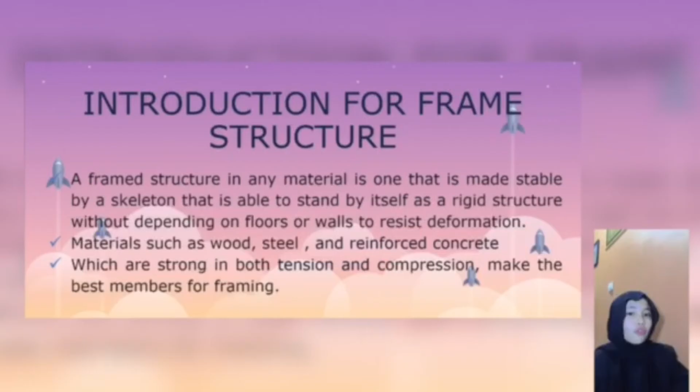Introduction to frame structure. A frame structure in any material is one that is made stable by a skeleton that is able to stand by itself as a rigid structure without depending on floors or walls to resist deformation. Materials such as wood, steel, and reinforced concrete are strong in both tension and compression, making the best members for framing. They are classified into two major types: rigid frame structures and braced frame structures.

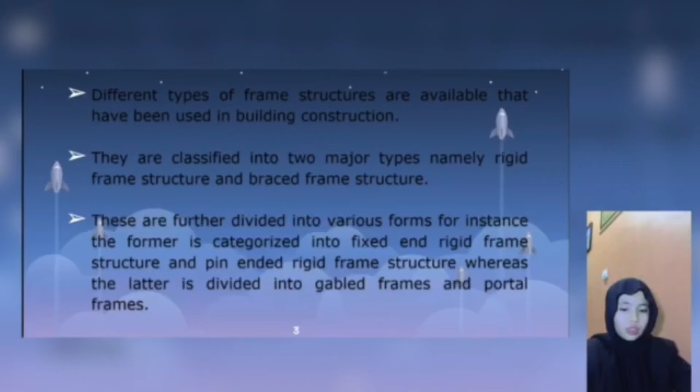These are further divided into various forms. The former is categorized into fixed rigid frame structure and pin-ended rigid frame structure, whereas the latter is divided into gable frames and portal frames.

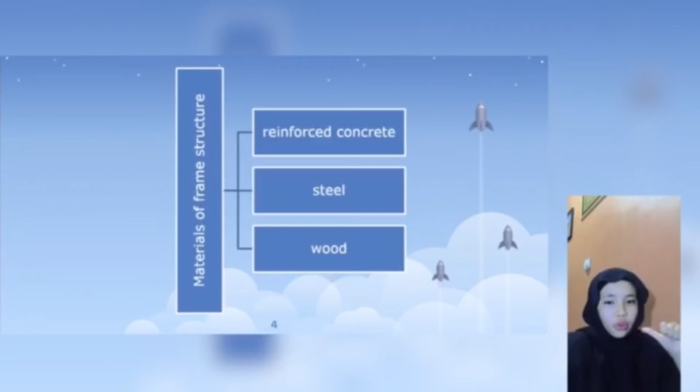Next, the materials of frame structure. There are three: the first is reinforced concrete, second is steel, and the third is wood.

Advantages of frame structures: one of the best advantages is their ease of construction. It is very easy to teach the labor at the construction site. Second, frame structures can be constructed rapidly. Third, economy is also a very important factor in the design of building systems, and frame structures have economical design.

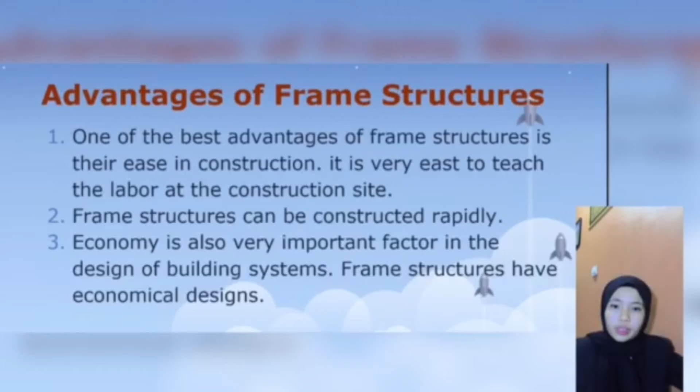Now, disadvantages of frame structures. Number 1, span length is usually restricted to 40 feet for normal reinforced concrete. Otherwise, spans greater than that can cause lateral deflection.

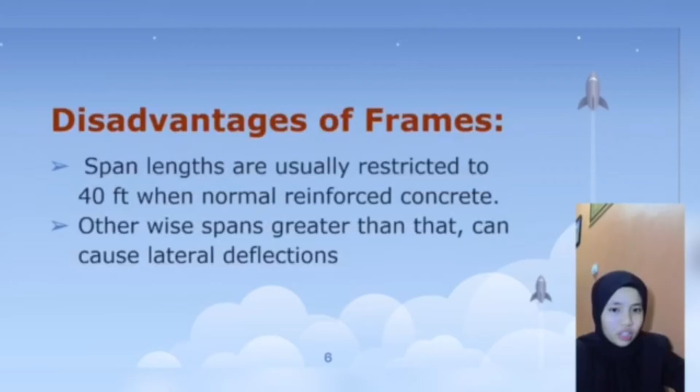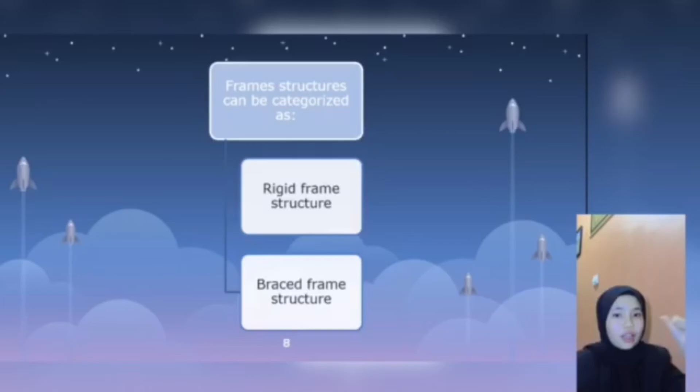What are the types of frame structures? Frame structures can be categorized into two: rigid frame structures and braced frame structures. The structure of a steel rigid frame building is characterized by its rigid connections of straight or tapered columns and beams. Rigid frame structures were developed in cities like Chicago and Cleveland in the late 19th or early 20th century.

This type of frame is preferred for its quick erection, open span, and versatile design.

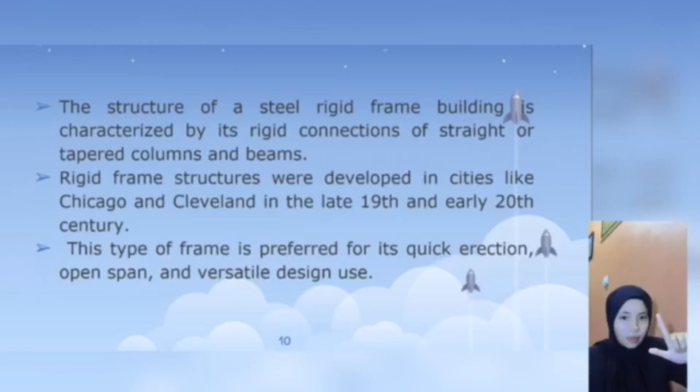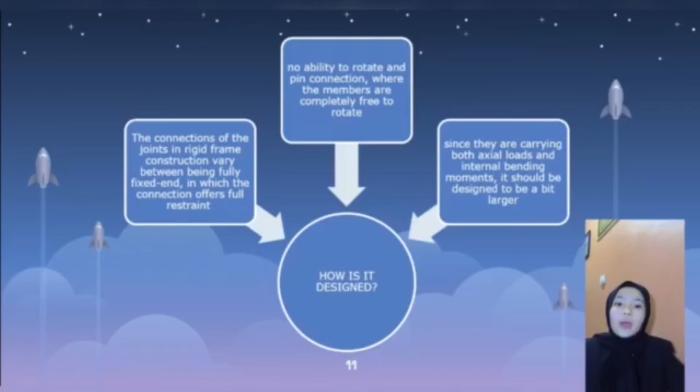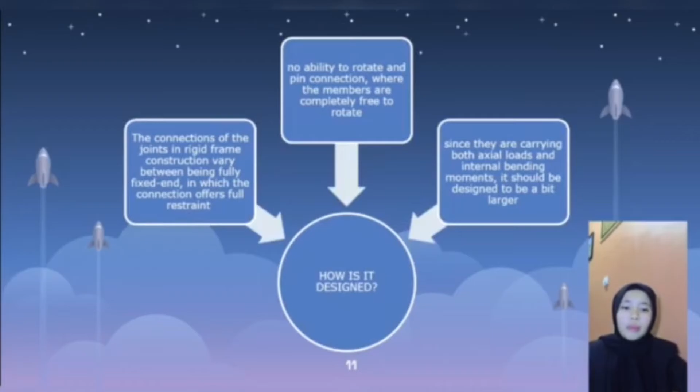How is it designed? The connection of the frame joint in rigid frame construction varies between being fully fixed, where the connection offers full restraint with no ability to rotate, and pin connection, where members are completely free to rotate. Since they carry both axial loads and internal bending moments, they should be designed to be a bit larger. There are some examples of building applications.

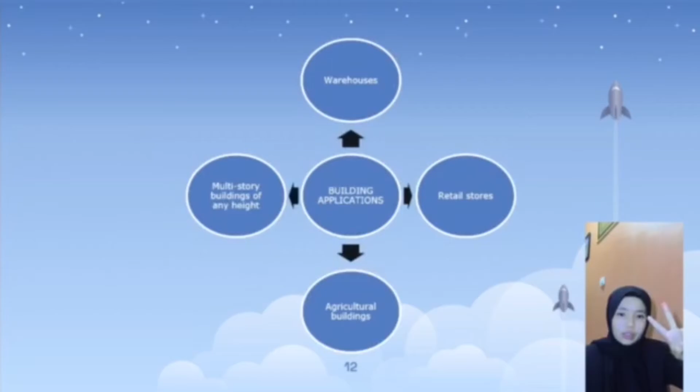The first ones are warehouses, retail stores, agricultural buildings, and multi-story buildings of any height.

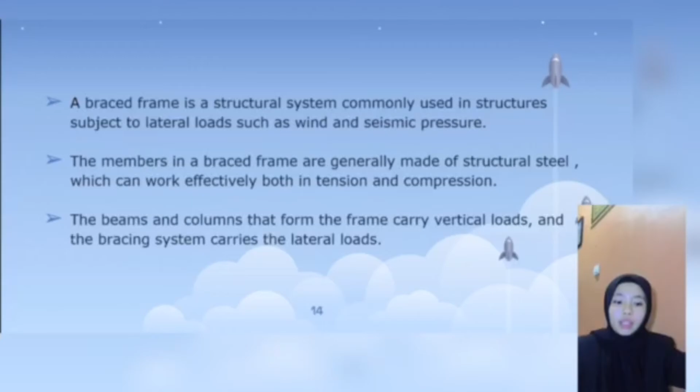Now, braced frame structures. A braced frame is a structural system commonly used in structures subject to lateral loads such as wind and seismic pressure. The members in a braced frame are generally made of structural steel, which can work effectively both in tension and compression. The beams and columns that form the frame carry vertical loads, and the bracing system carries the lateral loads.

The positioning of braces, however, can be problematic as they can interfere with the design of the facade and the position of openings. Buildings adopting high-tech or post-modernist styles have responded to this by expressing bracing as an internal or external design feature.

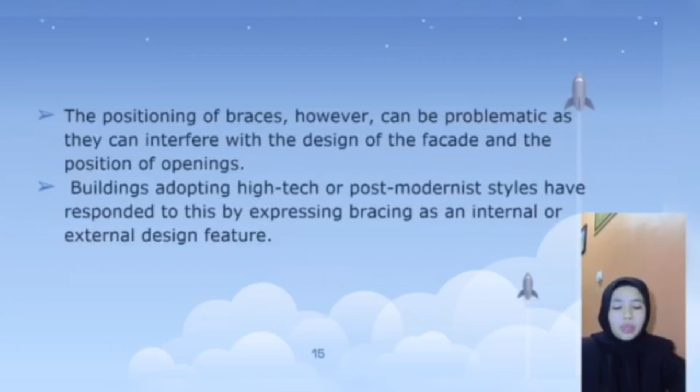So today I will talk about column. In this presentation, I will talk about what a column is, types of column, the function of column, and a few ways to install column in construction. Let's get started.

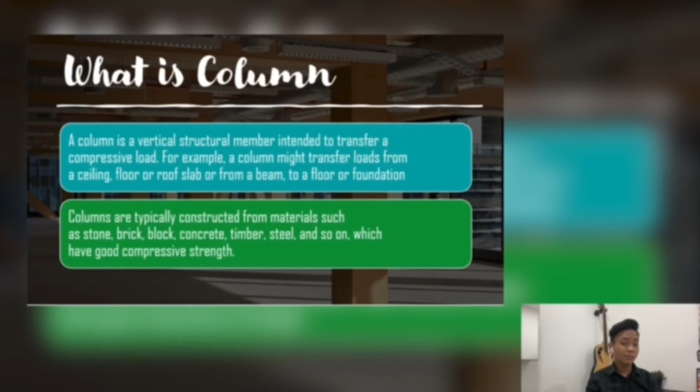First, the definition of a column. A column is a vertical structural member intended to transfer a compressive load. For example, a column might transfer loads from a ceiling, floor, or roof slab, or from a beam to a floor or foundation. Columns are typically constructed from materials such as stone, brick, block, concrete, timber, steel, and so on, which have good compressive strength. As we know, the column is the most important structure in a construction.

So first I will share with you guys about types of column. We've got tied column, spiral column, composite column, short column, long column, square or rectangular column, circular column, L-shaped column, T-shaped column, shape of steel column, shape of composite column, and some materials like concrete, steel, timber, brick, block, and stone column. But today, I will talk about precast column, timber, and steel column.

The first one is precast column. Precast concrete columns may be single or double-story high. The method of connection to the foundation and to the column above will vary with manufacturer.

Foundation connection may be via a base plate connected to the column, or by reinforcing bars projecting from the end of the column, passing into sleeves that are subsequently filled with grout. Alternatively, a column may be set into a preformed hole in a foundation block and grouted into position.

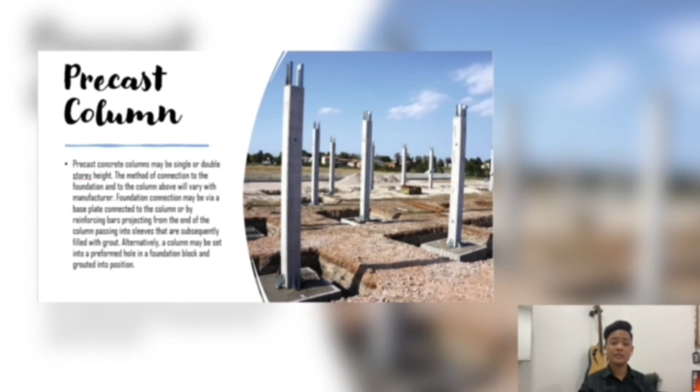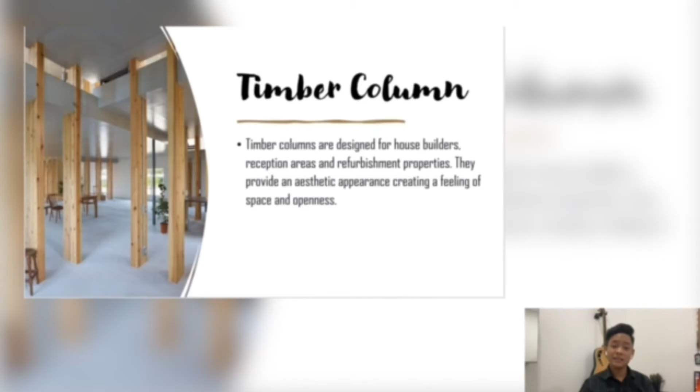Next, for timber column, they are designed for house builders, reception areas, and refurbishment properties. They provide an aesthetic appearance, creating a feeling of space and openness. And the last one is steel column.

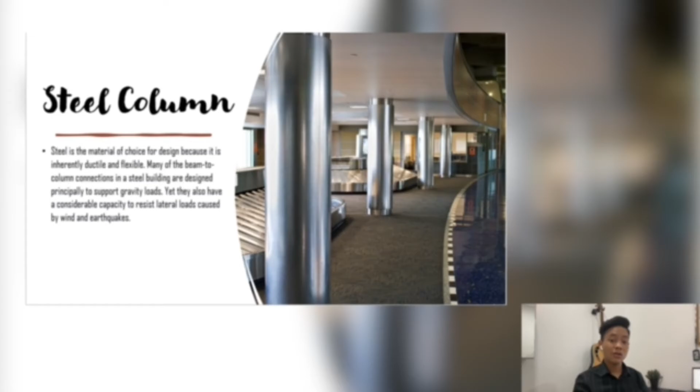Steel is the material of choice for design because it is inherently ductile and flexible. Many of the beam-to-column connections in a steel building are designed principally to support gravity loads. Yet, they also have considerable capacity to resist lateral loads caused by wind and earthquakes. Steel columns have good compressive strength, but have a tendency to buckle or bend under extreme loading.

Next, we will go through the function of the column. A column is used to support the weight of the roof and the upper floors. Nowadays, many columns are used for decorative purposes.

A column along with load-bearing beams can support a lot of weight. Columns are frequently used to support beams or arches on which the upper part of walls or ceiling rests. In architecture, columns refer to a structural element that also has certain proportional and decorative features. So, for me, column is one of the important structures.

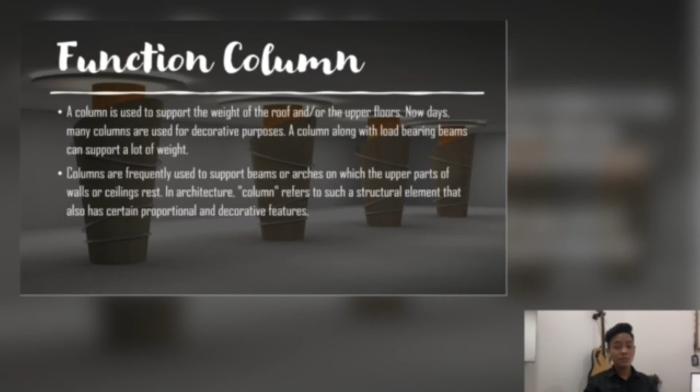Last but not least, I will go to column installation. We've got socket connection, bolted connection, and starter bars. For socket connection, this is undoubtedly a tried and true method, to the extent that even the ancient Romans used it.

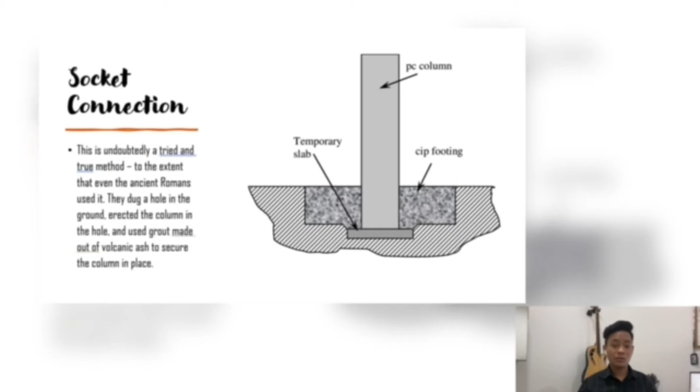They dug a hole in the ground, erected the column in the hole, and used grout made out of volcanic ash to secure the column in place.

Next, about bolted connection. Bolted joints are one of the most common elements in construction and machine design. They consist of fasteners that capture and join other parts and are secured with the mating of screw threads. There are two main types of bolted joint design: tension joint and shear joint.

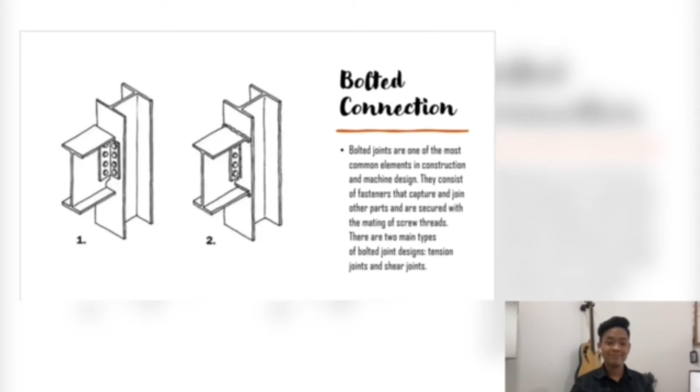The last one is starter bars. Starter bars column connection relies on rebars protruding from the foundation into the column. You need to have a hole for the starter bars and grout.

Typically, this is done in the precast factory during casting with corrugated pipes or similar. When the column is erected, it has to be supported, and non-shrink grout needs to be manually poured to secure the connection. Care must be taken to position the column properly while the grout cures.

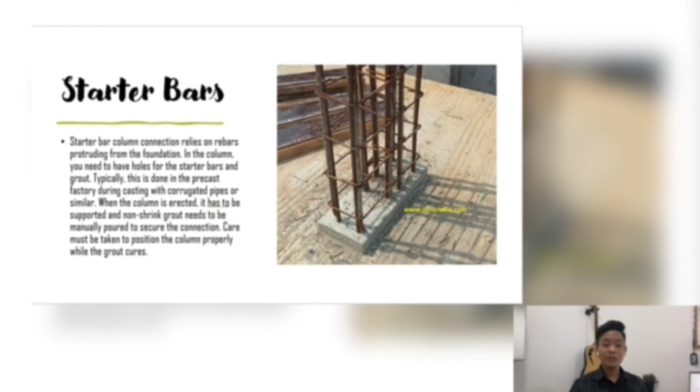Today, I would like to share with you about floor beam. Floor beam is a beam which is the direct support of the floor load of a building and transfers this load to the adjacent girders or column, also called a floor beam or floor joist.

These beams are commonly of steel, reinforced concrete or wood. Pre-stressed precast concrete is also used.

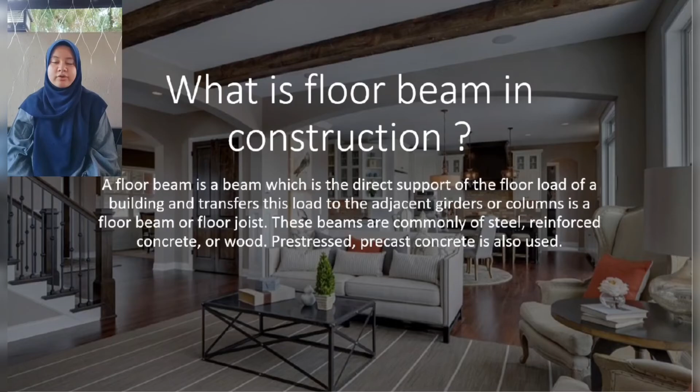Next is the function of floor beam. Beams are used to support the weight of the floor of a building and to transfer the load to a vertical load-bearing element of the structure.

Sometimes bigger and heavier beams called transfer beams are used to support the cumulative weight of stacked walls or other beams and transfer the load to the supports.

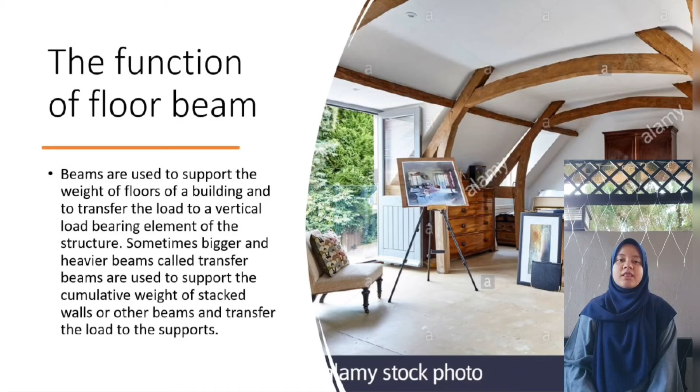The installation of floor beam: first, a minimum void of 150 mm must be provided between the soffit of the floor and the solum, and a continuous damp-proof course must be laid beneath the beam ends. Infill blocks to be aerated, aggregate or concrete 440 x 215 x 100 mm.

For garage floor application, blocks with 7.0 N/mm² compressive strength should be used.

Next is to seal the joints. The whole floor should be grouted with a nominal 3:1 sharp sand cement mix as soon as possible after fixing the floor joists and blocks.

The last one is floor finish. Floor finish applied directly to the grouted floor can be chipboard, reinforced concrete on insulation, directly bonded screed, or asphalt.

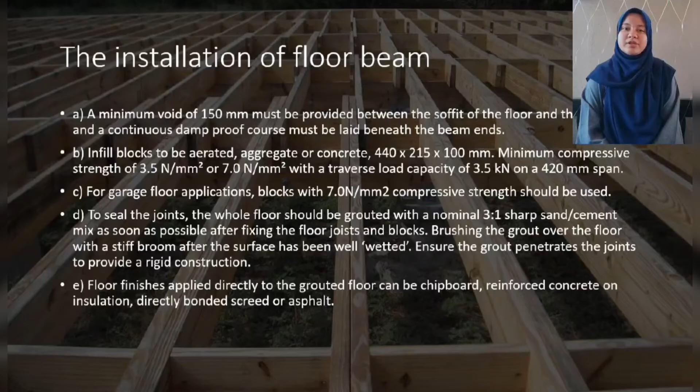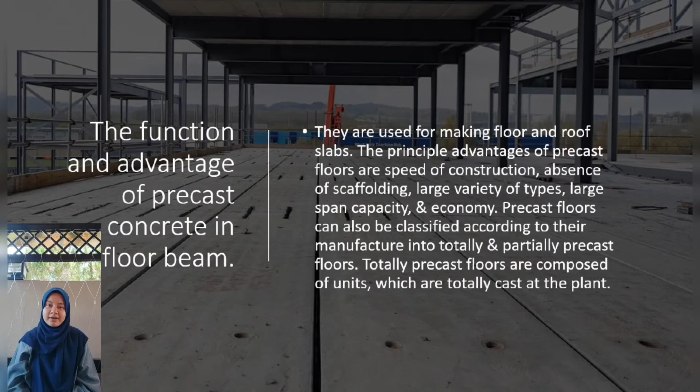Function and advantage of precast concrete. They are used for making floor and roof slab. The principal advantages of precast floor are speed of construction, absence of scaffolding, large variety of types, large span capacity, and economy. Next is the function and advantage of timber structure.

A joist is a horizontal structural member used in framing to span an open space, often between beams that subsequently transfer loads to vertical members. The principal advantage of timber is that it is not only tough and more durable than most other flooring products, but also healthy, natural, and easy to clean.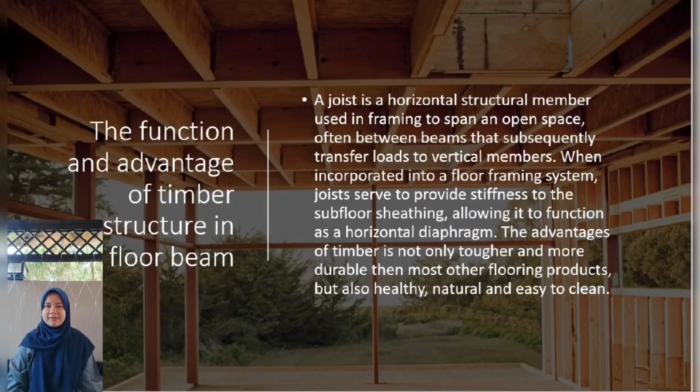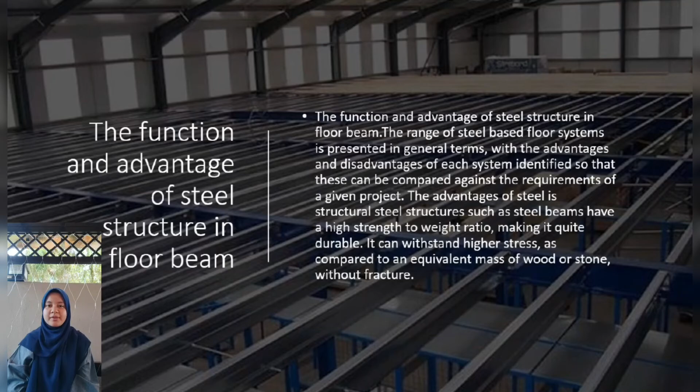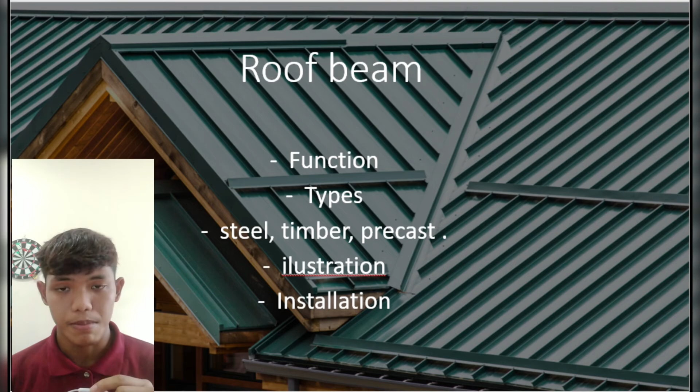Today I will present about roof beams. It's about function, types, steel, timber, precast, and lastly installation.

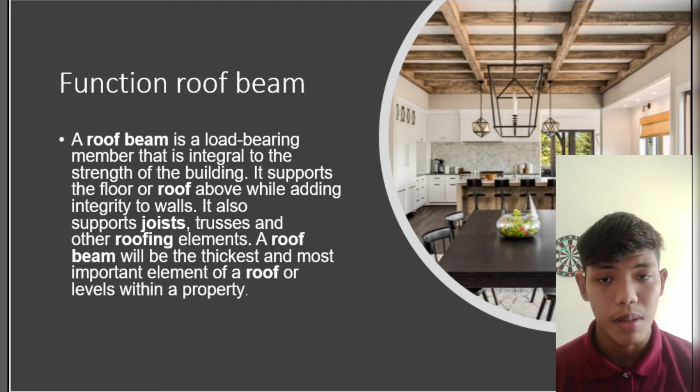Function of roof beam. A roof beam is a load-bearing member that integrates into the strength of the building. It supports the floor or roof above while adding integrity to walls. It also supports joists, trusses, and other roofing elements. A roof beam is the thickest and most important element of the roof or levels within a property.

In building construction, a beam is a horizontal member spanning an opening or carrying a load, may be a brick or stone wall above the opening, in which case the beam is often called a lintel.

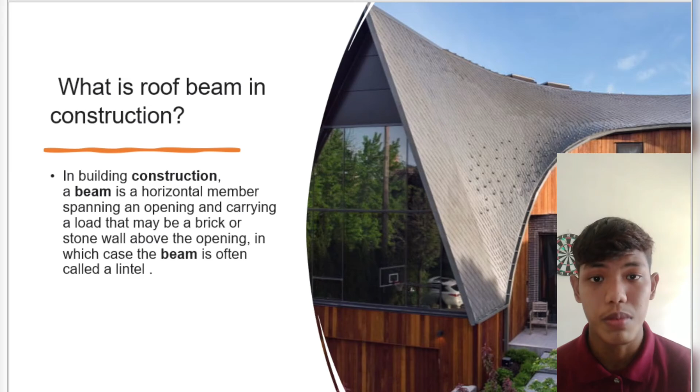Types of beams are three. First, steel beams, timber beams, and precast concrete beams.

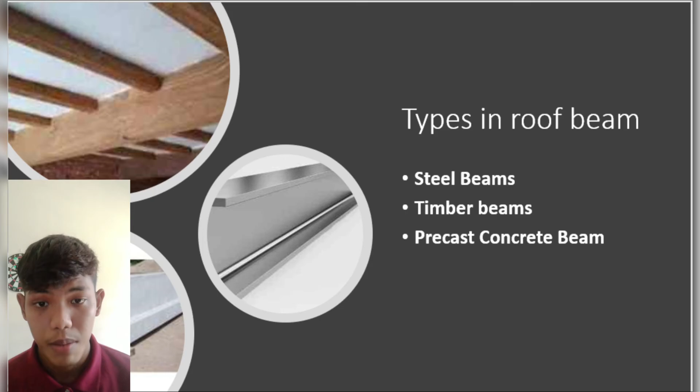Steel is used because it binds well to concrete, has a similar thermal expansion coefficient, and is strong and relatively cost effective. Reinforced concrete is also used to provide deep foundations and basements, and is currently the world's primary building material.

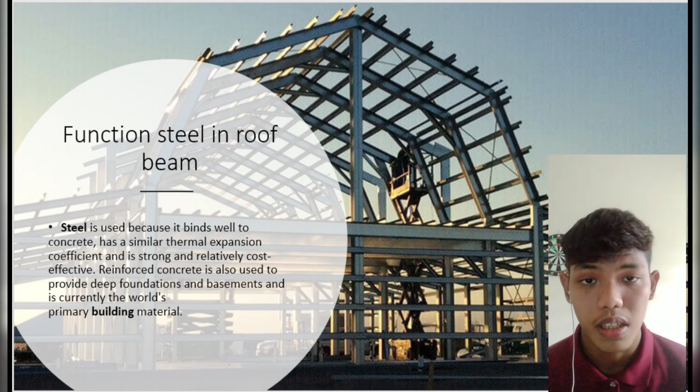Function of timber. Timber is a great insulating material. This means it helps to maintain a more constant temperature. Compared to materials like non-solid concrete or steel, timber will help reduce heating and associated energy requirements.

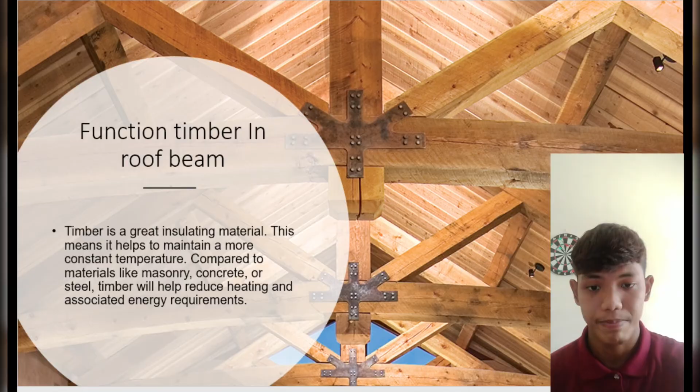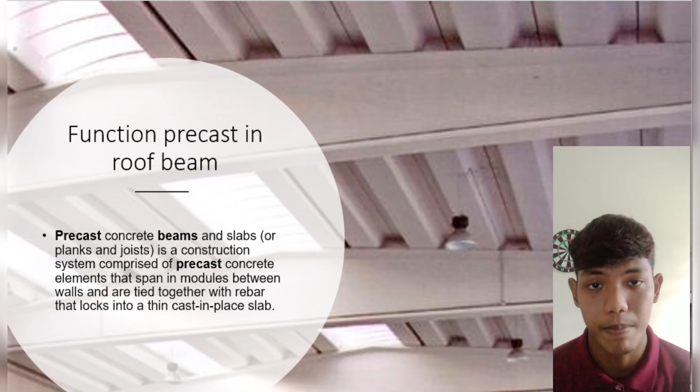This is an illustration of timber, steel, and precast.

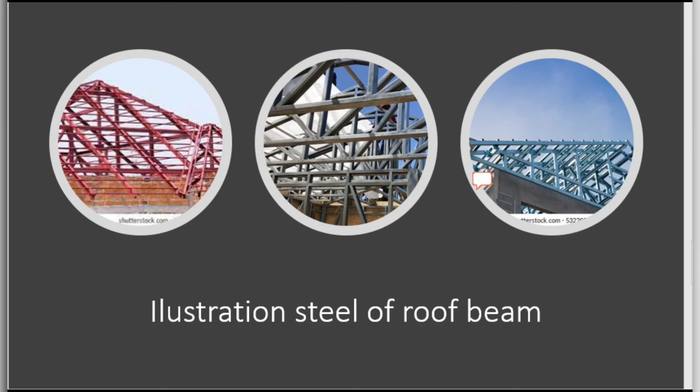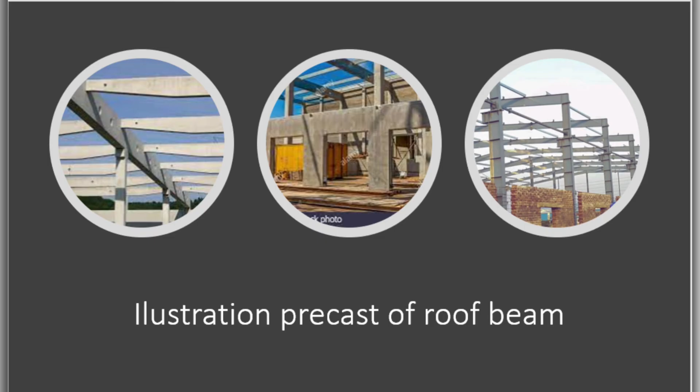Step 1: Once done with the material calculation, you can place an order for roofing materials. Step 2: The materials available for the roof include the stainless aluminum as the roof beam and the roof tile itself. This aluminum method is still new because it can save time and is durable.

The roof tile that is always used is concrete tile because it is cheaper than clay tile.

Step 3: When the materials are all ready, you need to attach the aluminum rods to become the roof beams. You can fasten it using screws and welding. The contractor will use these two methods based on safety.

Step 4: Next, when the beams are ready, they are joined and shaped into the roof structure you want. The next step is installation of the roof tile. These tiles are stacked on top of each other so that the air flows smoothly, allowing air to enter the house.

Step 5: If you are done with the arrangement of the roof, your roof is ready, so you can focus on building other areas.

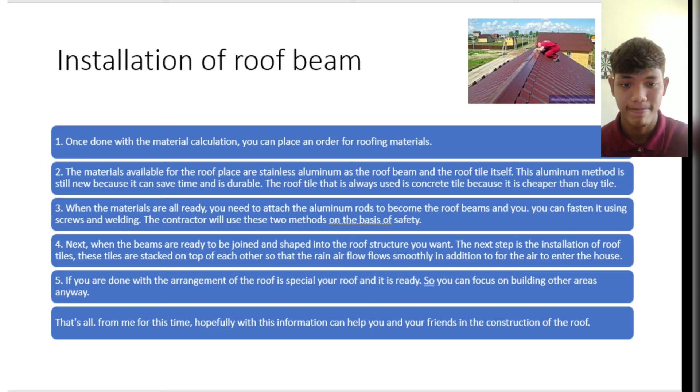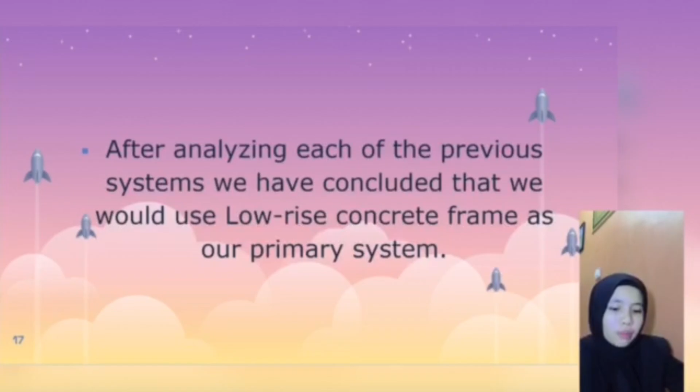Thank you. The conclusion is, after analyzing each of the previous systems, we have concluded that we would use a low-rise concrete frame as our primary system. This assignment required us to learn from all the groups in the previous project, then use that knowledge to decide a structural system which would serve us best on our assigned building.